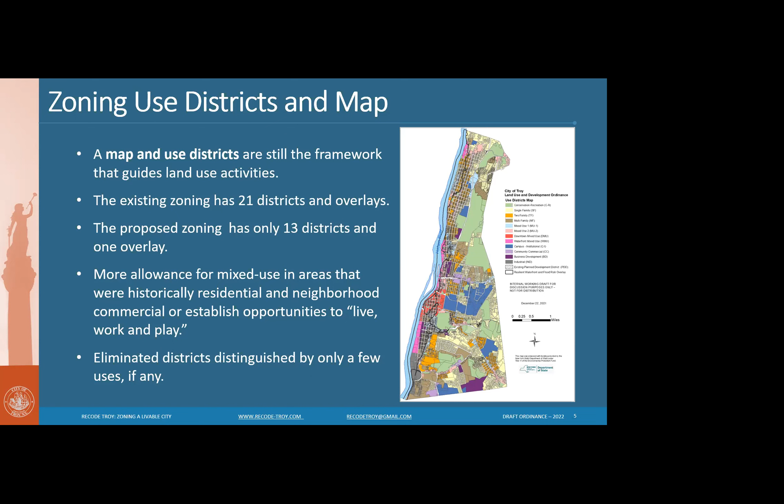The map also functions with a use table. This is an upgrade from your current code where everything is in narrative lists. Each district has a list of uses that are allowed, and then as you go up in intensity, it basically refers you back to the previous district. That's a very difficult way to try to find something in a zoning code.

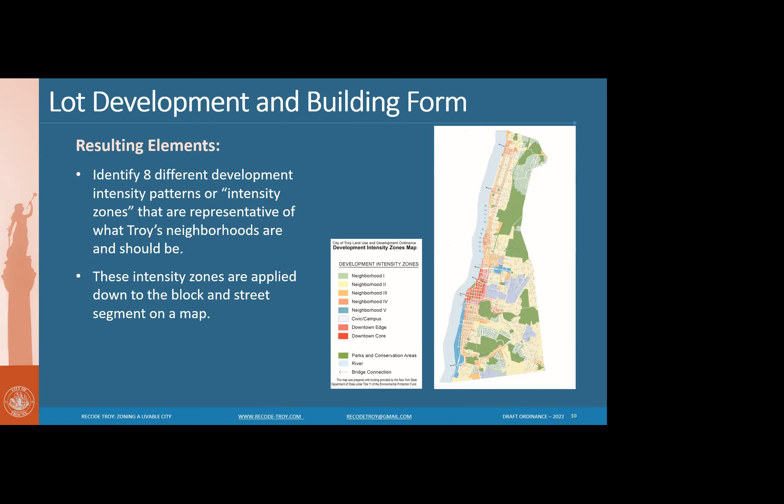And we do have some examples to run through here, so I will do that. So what I wanted to just do, sorry, I'm going in the wrong direction.

Some of the elements on the pages we're going to show you in a second. So we eliminated minimum lot sizes and minimum square footages for dwelling units, so there is not a cap on density per se. Eliminating the minimum lot size will definitely improve the ability to use infill lots around the city. We did keep the lot widths in the really low density neighborhoods, but other than that, the elimination of the minimum lot size requirement I think will add some significant flexibility.

We also created build-to lines and maximum setbacks for front yards. Certainly the suburban form of setbacks of 50 feet and 25 feet creates a very suburban environment, where most buildings in an urban environment are built to the street. So we've created build-to lines or maximum front setbacks.

We do have some minimums in areas that are more, I guess you would almost say, the least dense neighborhoods - the more modern residential developments that have taken place in the city. Some of them do have setbacks, and we did maintain that. So we do have a district that focuses on a more, I guess you would say, almost suburban feel. But then the other districts increase in density and the setbacks reduce as you move through the city.

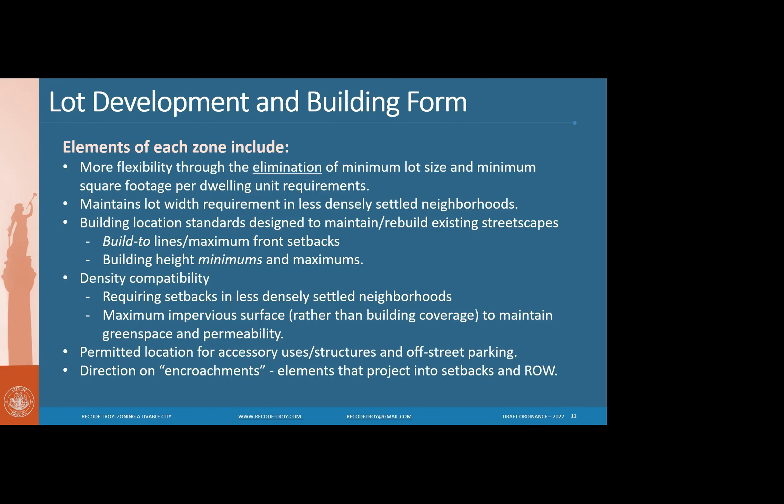And so each district has one of these. There are 8 of these pages, and they all address the things I summarized. They provide illustrations of how they work, and a couple of photographs, as well as an intent summary in the corner. So hopefully this will provide a lot more visual guidance for the boards when they're looking at development. We tried to cover as many things as we could without being overly prescriptive, so we're hopeful that this will provide a lot more guidance than the current code provides.

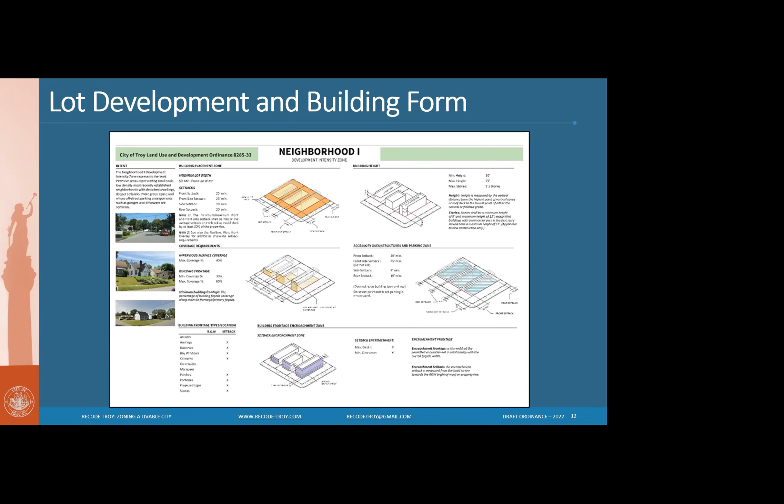What we have - here's a couple of others. So this is the, I guess you would say, more suburban residential neighborhood format. And then you'll see the most intense is the downtown core. So you can see just by looking at the graphics that everything kind of jumps in scale and density and site build out. So just for a couple of examples.

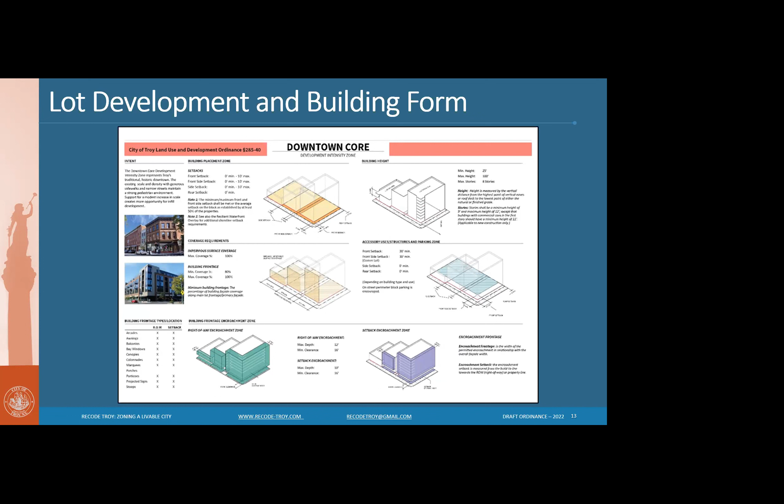I'm going to run through a couple of example scenarios of how this would work, because I think it's easier to do that than just describing this. So we've taken the former Price Chopper Plaza in Lansingburgh as a redevelopment site.

We're assuming here that the property is acquired, or if somebody's thinking of buying it. So it's a 3+ acre site with 435 feet of road frontage, 340 feet of depth. And the adjacent property is in play as well.

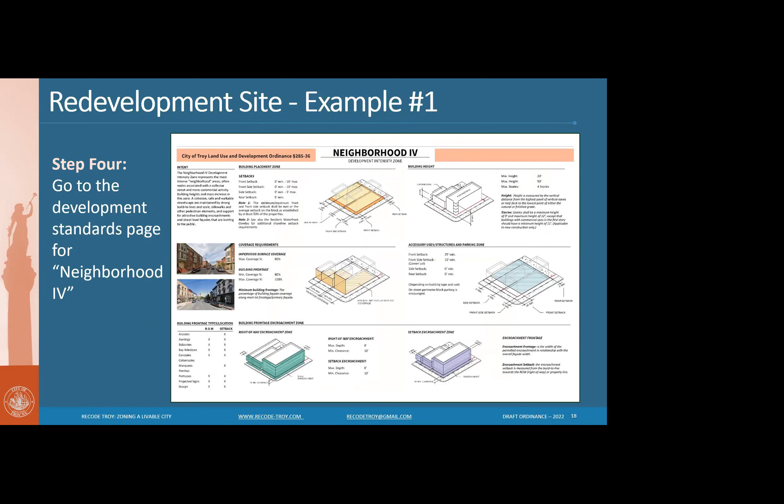The flip of that would be: I am a multifamily housing developer and I would like to build a development. In this case, I've used this existing, somewhat iconic Troy building to say, where could you build this?

So if a developer wanted to essentially maximize what they could do on the site, with almost 100% build out of the lot, a 4-story structure, thinking about the number of units they're looking to build, what you would start with is step one: where am I allowed to do multifamily?

So then you can look around on the use map at where these districts are located and start thinking about properties in those locations.

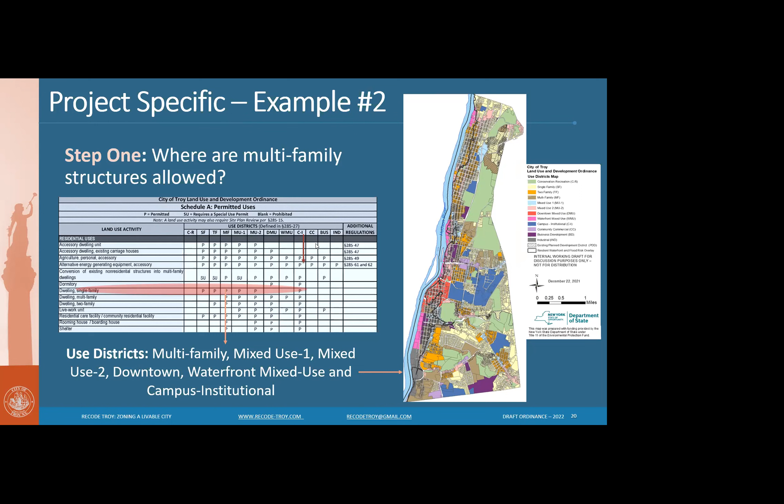The next step would be to understand—okay, where can I build a 4-story building? Because I know I want to do X number of units, and I'm going to need a more intense district where I'm allowed to build out to something like 4 stories.

Then you look at each of the intensity sheets and see where am I allowed to really build out properties. The 4 that leap out are the neighborhood 4, downtown core, downtown edge, and civic campus, because they do allow 4-story structures.

There's flexibility in terms of build out of properties, so you'd be able to maximize those units. And you can build right to the street wall, so you're really able to use that flexibility.

So once you know that, you would combine the use location—where multifamily is allowed—with these 4 districts, and start to drill down to portions of the city where a larger multifamily housing project could be located, looking for infill sites. It's just looking at it both ways—that's how you would use these.

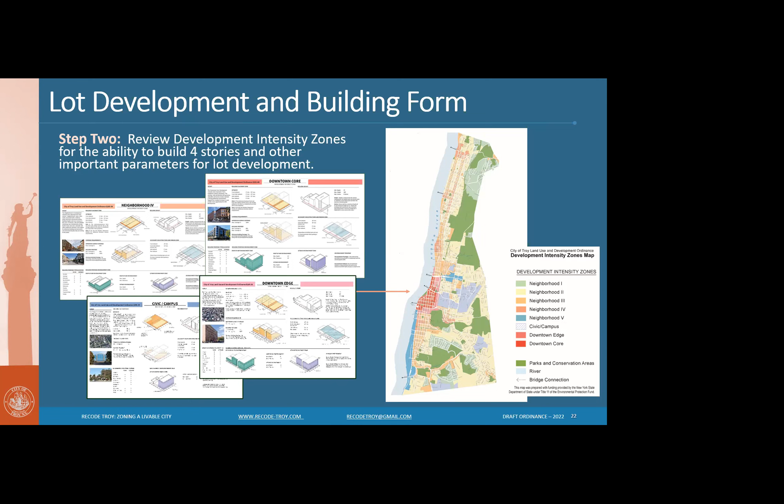All right, I'm just going to go through this whole thing and then we can discuss afterwards. I think it's easier since we can't do the interface of seeing people.

So another component of the build obviously is site development and building form architecture. The current zoning has no architectural guidelines, no real standards—there are some guidelines I think in the Hoosick Street district and the T1 in downtown, but for the most part there really aren't any architectural standards in the code.

So we have developed a set of standards that would apply to development citywide. They're fairly general, although comprehensive in length here, but they stick to general characteristics. We don't dive into this the way some form-based codes do, where they really delve into real specificity about what kind of buildings can be built in certain locations.

This is more of a guiding document. There are some elements that say 'shall,' where we really felt strongly they were important, but a lot of it is preferred or should, to provide guidance. It's guidance for the planning commission, the development community, and city staff when they're looking at projects.

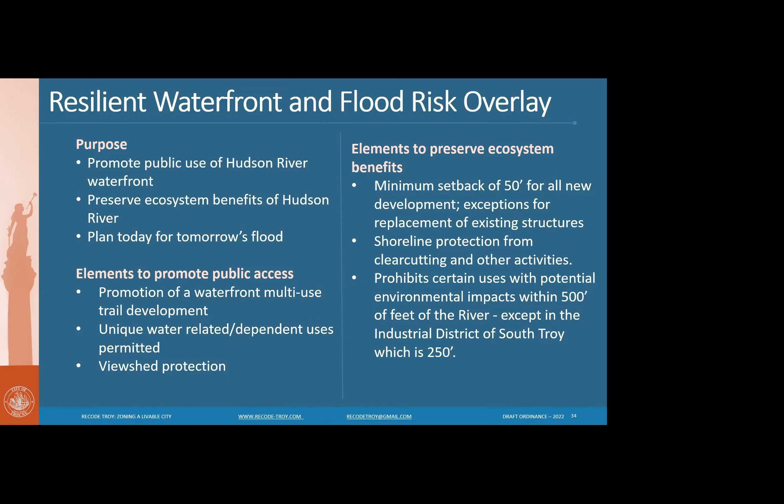So you will see a list of prohibited uses in this overlay district that should be taken into account in addition to what it says on the permitted uses table. And then the other element of this is planning for tomorrow's flood.

This is where we felt it was important to try to really understand how the floodplain works in the city, how flooding works in the city to the extent that we can. We had a specialist on our consultant team, James White, who did an analysis of Troy's existing flood maps, the insurance rate maps, the firm maps, which date back to 1979. As a result, you would assume they're relatively unreliable given their age. We did find that not only are they from 1979, but some of the data is really still carryover data from before the Conklingville Dam was put in, which obviously directly affects the city of Troy and how water moves and floods.

As a result of that analysis, he felt it was important to re-describe what the floodplain probably looks like in the city. So he did that as part of this project, just so we have an understanding. It doesn't replace the firm maps until FEMA updates the firm maps. The 1979 maps stand, but for our purposes, it was important to really have a better understanding of what the flood zone probably really looks like in the city.

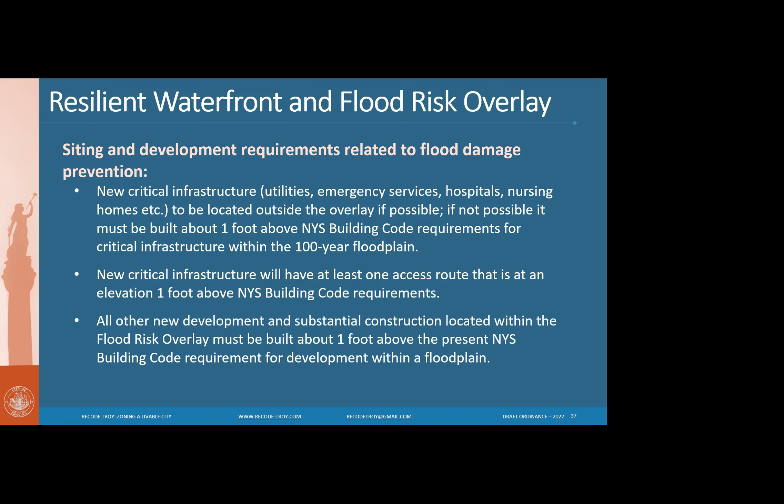So that concludes the new standards or the update to the standards section. I do have a few slides here because I am working with you here with the ZBA Planning Commission. We do have a few slides here on permitting and any updates to that I did want to go through.

Monica, I just want to jump in on the zoning map. Yes, one of the things we didn't mention was, I'm sure everybody's wondering, what did we do with the parcel in Lansingburgh on 2nd Avenue at the very northern end of the city? Yes, you were going to mention that at the beginning, you promised. And I forgot to. You want me to go back to the map?

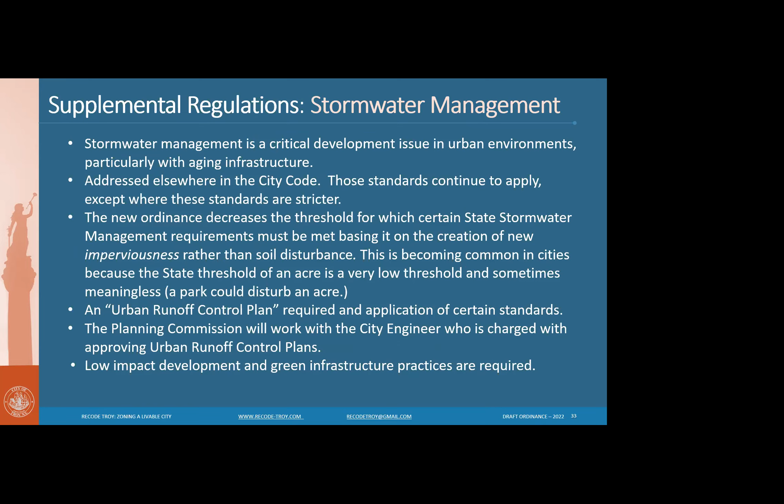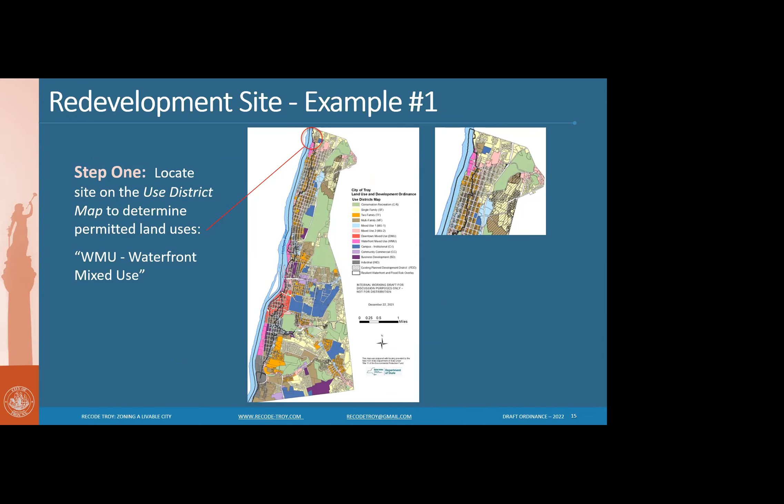This is, I don't know if you need to, but this is a damned if you do, damned if you don't scenario. What we determined was that because the city council is currently reviewing that parcel, we would leave it to the city council to review. And we are leaving it as single family because we didn't want opposition to think we were trying to pull a fast one. So we're leaving it going through the same process it was.

And likewise, on the flip side of that, the question will be asked then: well, if we wanted to change it, why did we not change it in the zoning ordinance? And again, there was no great way to deal with this. We did not want that to be a bone of contention with the adoption of this new zoning ordinance. So we are continuing to let the city council handle that issue.

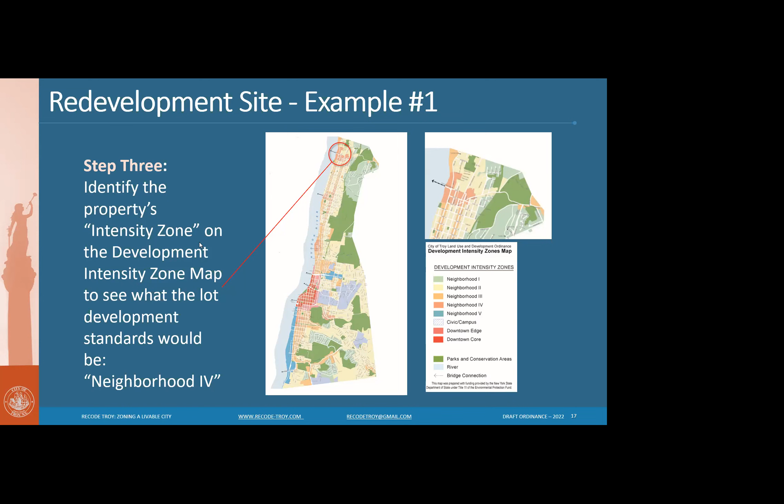Okay. Sorry, I don't know why I went to that map. That really wasn't necessary.

Okay, so for codes and review, or permitting and review, code enforcement. For the most part, the projects that the Director of Code Enforcement were reviewing before, they will largely continue to do so.

We did expand the list of activities that are exempt from site plan review. Right now you just have, I think, single and two-family home and customary accessory as the only things listed. We elaborated on that. We didn't really increase the uses in terms of the larger uses themselves—primary principal uses for the most part still go for site plan review.

But we just clarified that list considerably. For the most part, Code Enforcement Director will do the permitting for single and two-family dwellings and customary accessory uses. That remains the same.

They will continue to review signage, except electronic message centers and common signage, which we allowed in a limited fashion in the code, will go to the Planning Commission for a recommendation before they're approved by the Director of Code Enforcement. Common signage plans, which we have provisions for, will also go to the Planning Commission before they get sign-off by the Director of Code Enforcement.

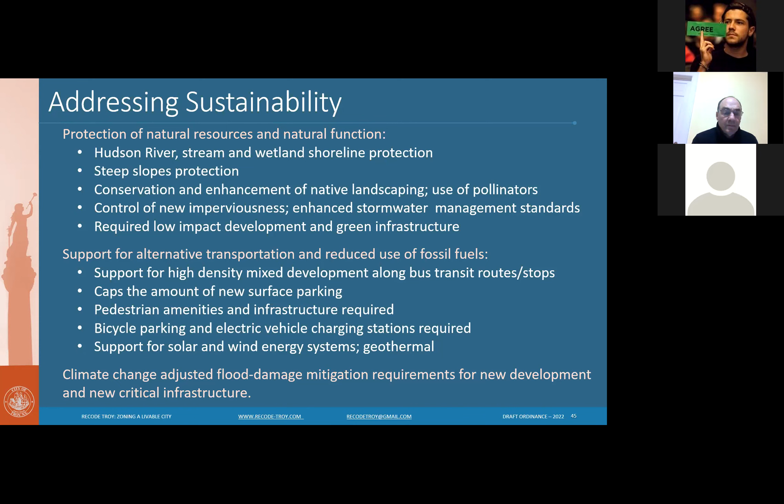So that, in conclusion—I beat the 8 o'clock mark. All right, that is my spiel on our zoning update.

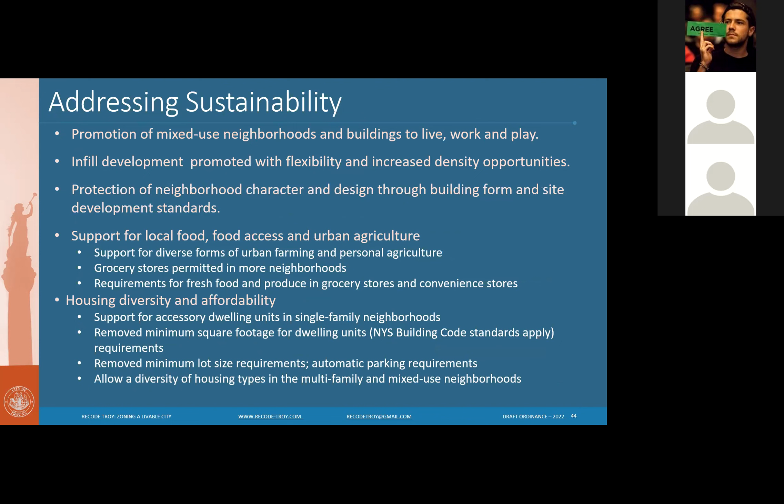Steve, I'm not sure, I'm going to just stop the share unless you think I should leave this up. Why don't you leave it up, because otherwise you're just looking at... Why don't you stop the share so people can at least see the names.

Now we'll open it up for questions from the commissions, and I'd like to congratulate you. We have, with one note from a doctor, 100% attendance from our three boards. So thank you for that. Very good, all right.

We did receive a number of questions from the public. Again, I wanted to keep this at the 10,000 foot view. Some of the questions were specific. Many of them Aaron and I answered, and I see more coming up, but there will be many more meetings at which the public will have a chance to first view the ordinance and then ask questions as well. So, are there questions from the commissioners?

Yes, Steve, this is Wally from the Historic Review Commission. I have a question. Go ahead, go ahead, yep. I noticed that in Lansingburgh, in the area of the old downtown, that is not designated downtown mixed use. What's the thinking behind that?

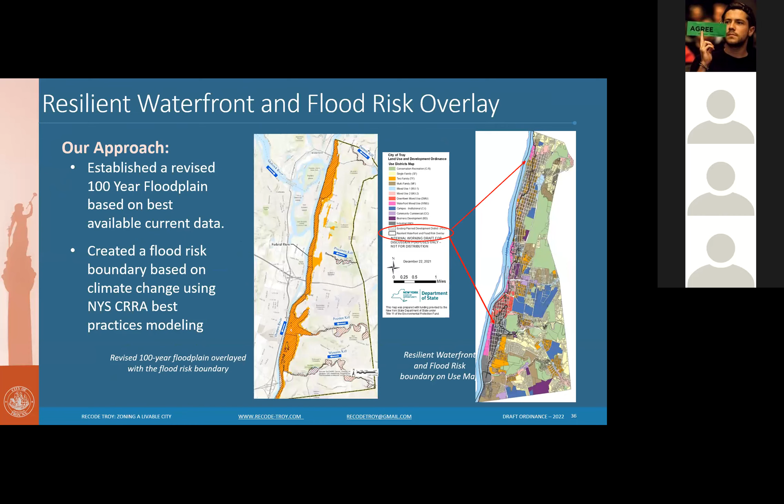So it is designated Neighborhood 4, which is a fairly dense character. The way it lays out... let me just share my screen again, because I think that was one of the slides. Neighborhood 4 does allow for 4-story build to the lot line required, build to the street frontage, very shallow setbacks if any. You can have shared street walls. So the intention is still to be urban, a fairly urban character.

It's just not as urban as 7 stories, 100% build out the way downtown is. But a lot of the characteristics are similar. It's mostly a height difference, not so much a scale and build out difference between the two characters, to be honest with you. So I think most of our thought was that the scale of buildings downtown in terms of height is where there's a divergence from what you'd probably want to see in Lansingburgh. But if you look at Neighborhood 4, the build out is fairly dense and quite flexible for what we hope you'd want to see up there, especially on the northern corridor, which definitely could use some redevelopment.

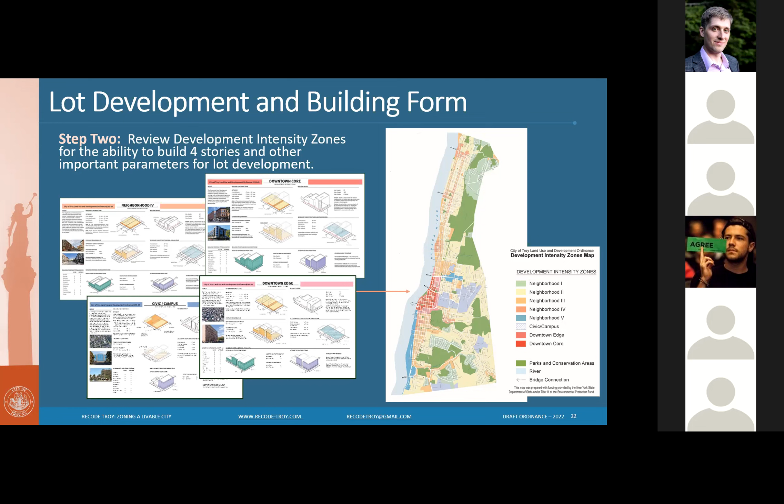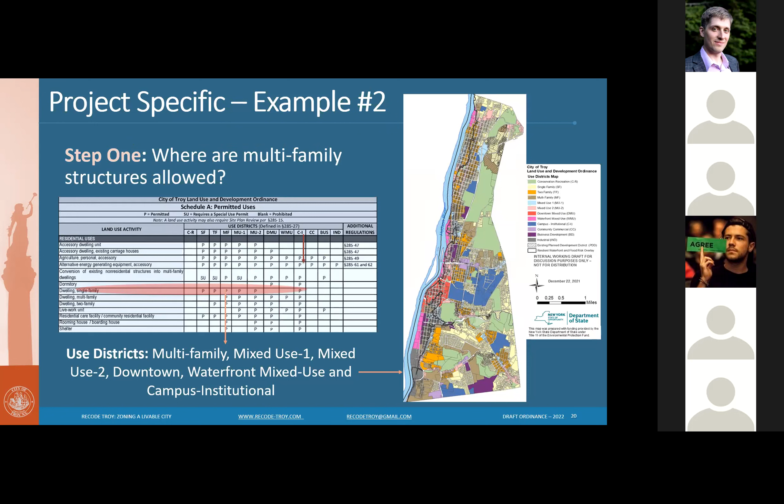Related to the earlier comment about Lansingburgh, I was actually looking specifically at South Troy and had a similar thought, looking at the new proposed map, much of South Troy is classified multifamily. I think there's a lot of great stuff in what you guys have done here, particularly in the expanded use of mixed-use zoning. And I wonder why so much of South Troy, which could have a walkable urban feel, excludes uses that I think would be perfectly appropriate given the context - for example, grocery stores, cafes, all the stuff that would further the city's goals of creating sustainable urban neighborhoods where people would not have to use cars to access those basic amenities. It seems like the same issue identified in Lansingburgh is also present in South Troy, where those uses are excluded.

So we did actually spend a lot of time bopping back and forth on what to do about South Troy. The light blue corridor, Route 4 - when we settled on it, we thought that, given the nature of that narrow stretch, when we looked at Route 4 we said okay, that is a place that has a mix of uses. It's less conducive to housing, more likely a place that might turn over to more commercial. So we did purposefully zone all of that mixed use, which it is not currently - most of that is zoned just residential in the current zoning.

So that is almost an entire changeover to mixed use. And I think what we felt was that, at the northern end of South Troy, South Central, we do have some mixed use areas just north of the canal. We transitioned to more mixed use for a while.

I think our thought was you could get to the route, just thinking about walkability. We didn't want to dilute every place. We wanted to make sure we created nodes of mixed use and concentrations of places to walk to instead of just scattered sites, which would dilute from an economic development standpoint. It dilutes that placemaking and that desire to site a mix of uses with other mixes of uses. So we were focusing on creating nodes or corridors where it just made sense.